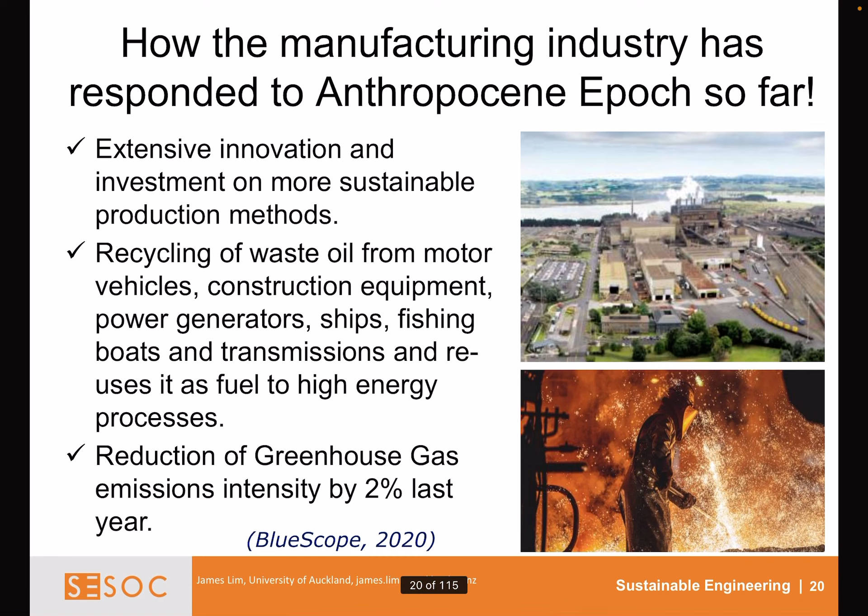Some further responses to the Anthropocene epoch: using co-products or waste products as a substitute raw material. Firms are investigating various co-products that can be used to reduce the carbon footprint of a finished product. An example here is using GGBS in concrete for harsh environments so that high quantities of cement are not required.

Electricity being generated from the production processes, harvesting heat energy, solar energy and wind energy to help run the operational process again. The key example here is solar and wind energy being generated from a production plant to help run the next key phase of production.

And finally, water recycling. Almost all production processes require water usage. This water can then be recycled back through the system numerous times before it is disposed of in an environmentally friendly manner, e.g. steel fabrication. The aim as a nation is to have a net water usage of 0.

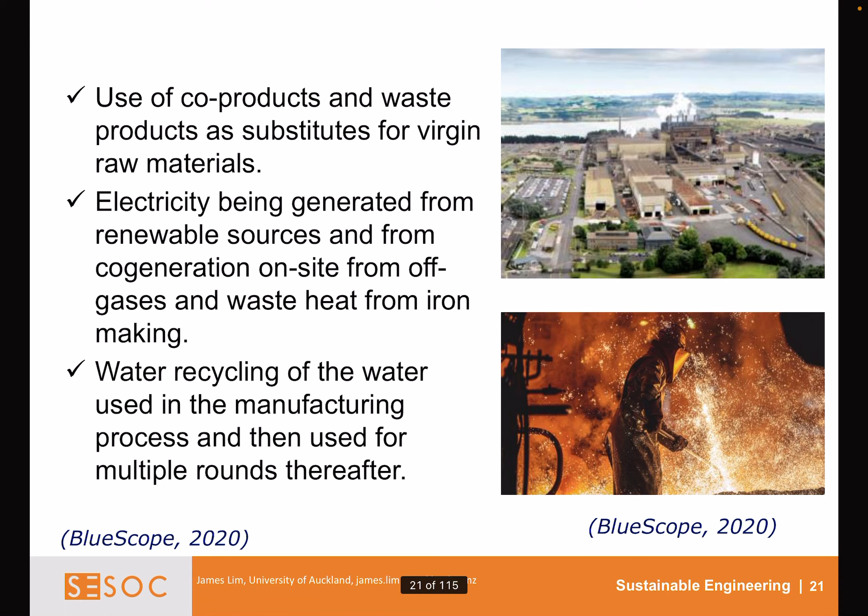What else can be done? Further collaboration with research institutes, perhaps partnering up with research institutes or leading universities to carry out research on more efficient ways of doing something.

Increased rate of energy harvesting from industrial equipment. We can increase the amount of solar, wind or heat energy being harvested from the production process. This can be used to aim for net energy usage of 0.

Enhance safety precautions and training for workers to enable worker protection while in the workplace. So further training and incentives to employers to promote a safer and healthier work environment is key to a more sustainable and restorative work environment.

Employ partnerships with local firms to use waste material as an energy source. Waste material from the production and construction processes used at industry plants to generate energy for the production process. This is commonly done at cement production plants, where waste needles are taken from hospitals and used to generate energy by burning them in the furnace.

Number 5, examine alternative sources of transport for finished product, i.e. train, barge, boat, etc. The most common method of delivery is by truck. If a site is in a suitable location, or if long draws are required, look at alternative options that can be used.

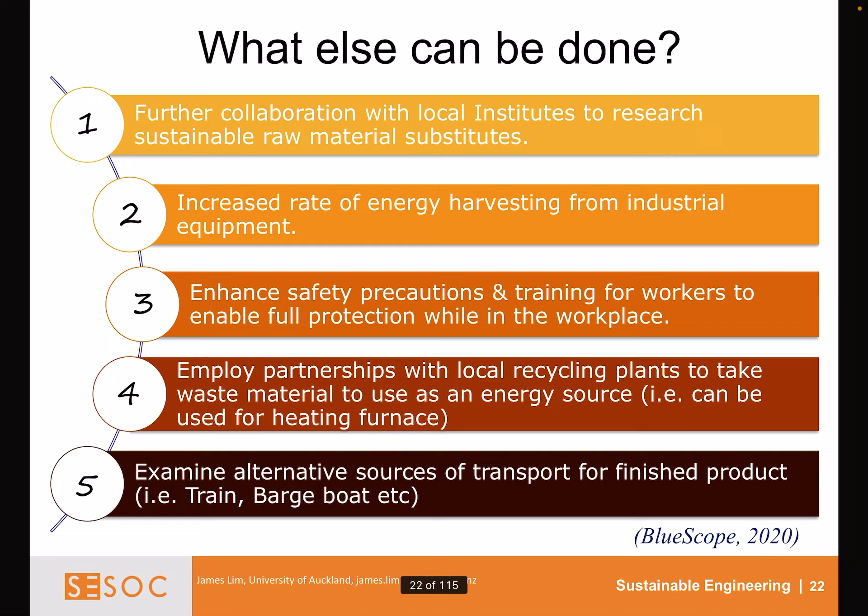Designing for sustainability. What are the various ways the applied action can be resisted? We're going to have a look at some typical structural engineering examples to start off with: first, a bridge project; next, a clear span structure, a transfer structure, a column design, and finally a steel connection design.

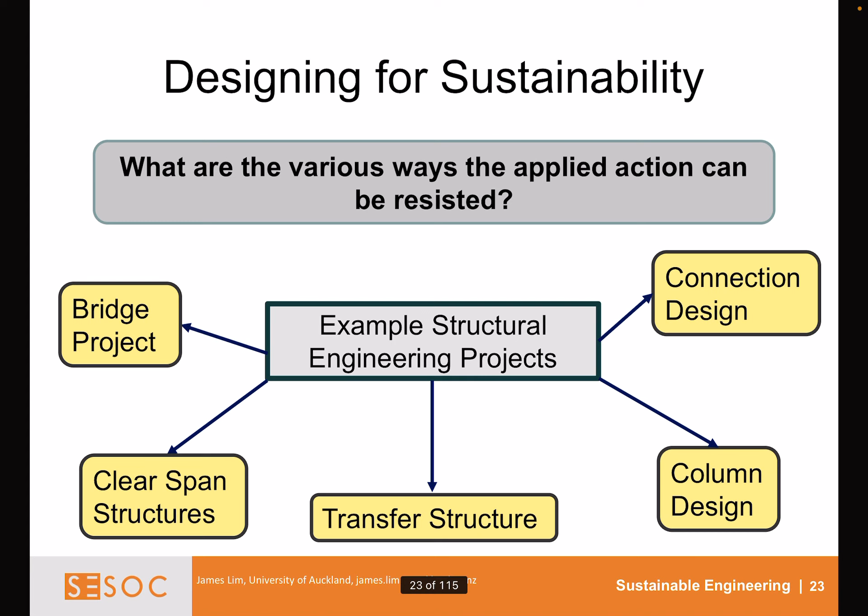So, taking a closer look at these examples: bridge project. If we have a 300-meter span, a suspension bridge would be more suitable than, say, a tied arch or catenary bridge. If we start with a tied arch bridge, how sustainable do you think it will be in regards to structural efficiency, material usage, deflections, etc.?

Now, looking at clear spans. For a 50-meter open span inside a building, what do we need to consider? If it is a warehouse, it does not need to be pretty, and enclosing it with a portal frame usually just meets specification. What about an airport?

A portal frame or space frame may not be acceptable. Perhaps a space frame may be more acceptable though than a portal frame. We need to make sure that people feel comfort and welcomed by inviting them into a sustainable, restorative development.

Number 3, extremely large actions on columns. What are the most common options? A: we can use pure reinforced concrete columns, which will be large, clunky sections that take up a lot of space. Construction issues that will arise are differential heating leading to cracking, and finally very large quantities of cement will be required, increasing the carbon footprint of the development, etc.

As an alternative, we can use pure steel columns, which generally require a specialized steel grade, such as S460NL. Some production issues that may arise are the fabrication of very thick plates, requiring preheating of plates to allow fusing of the plates during the welding process.

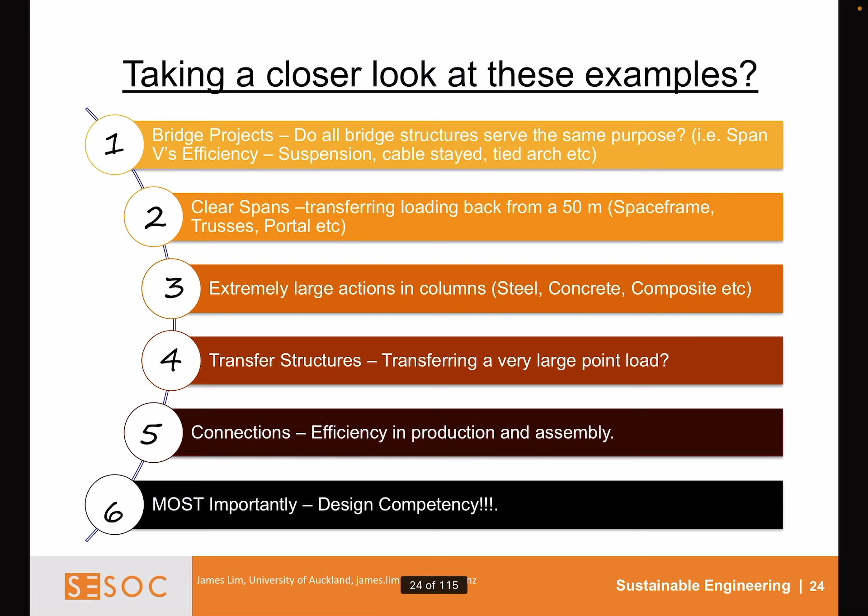And finally, we have design competency. If you have not completed a design process before, you need to have some training and guidance before, during the task. All calculations must be checked by an experienced engineer.

So, fundamentals of engineering to approximate section size. In any conceptual design, it's essential for us to have a strong foundation in our structural mechanics. It could be treated as the foundation for starting any sustainably sized section.

For example, there's no need to use an 800mm deep reinforced concrete beam if all we need is a 500mm deep beam. This 500mm deep starting point can be easily extracted from your mechanics calculations.

The fundamentals of engineering should be used for sizing all structural elements at the initial design stage, and it provides a foundation of understanding to why exactly the chosen size has been selected.

Speak and review as you go. A quick example has been included here to size a steel beam, and this should be told as a story. As you can see here, using these equations, you're able to get a very quick idea as to the size.

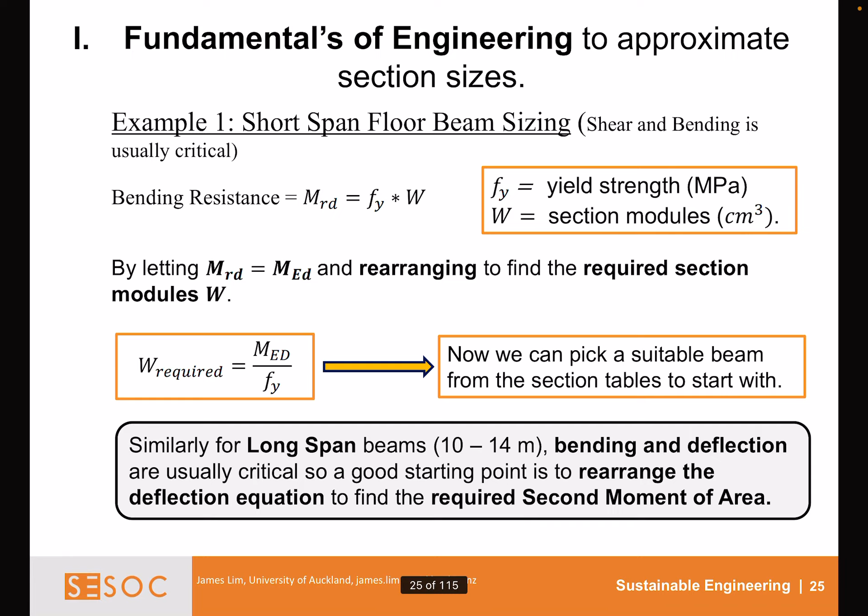More commonly, what's used in design offices are span to depth ratios. These require less work and less understanding, possibly an unfavorable approach. We need to have a good understanding of the fundamentals of engineering to understand the boundaries within which we work.

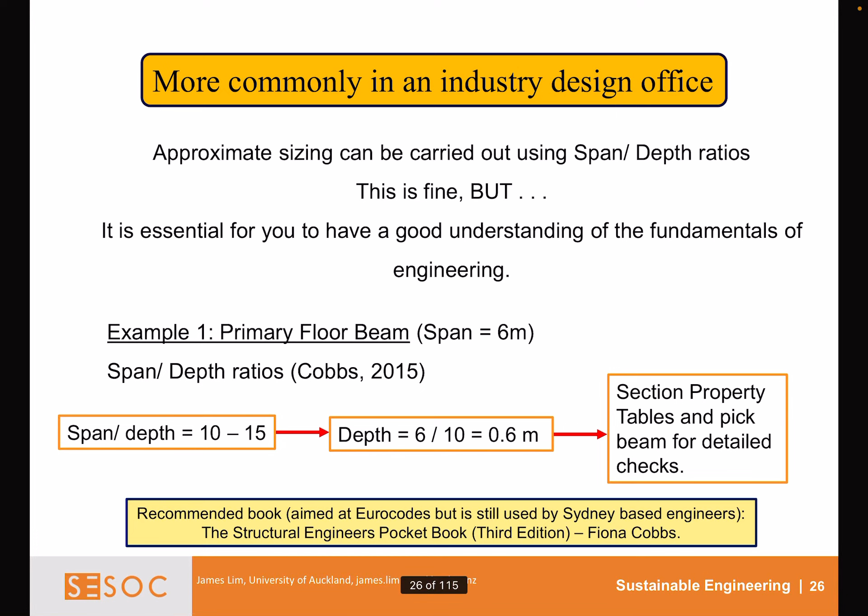So the second example is the typical truss with a point load applied to it. Bending resistance is treated as a push-pull or couple resisting the bending action. The tension and compression resist the bending moment through the couple force action, therefore C equals T.

Now we can pick out a suitable section from the section tables to start with. Buckling capacity will be critical. Similarly for...

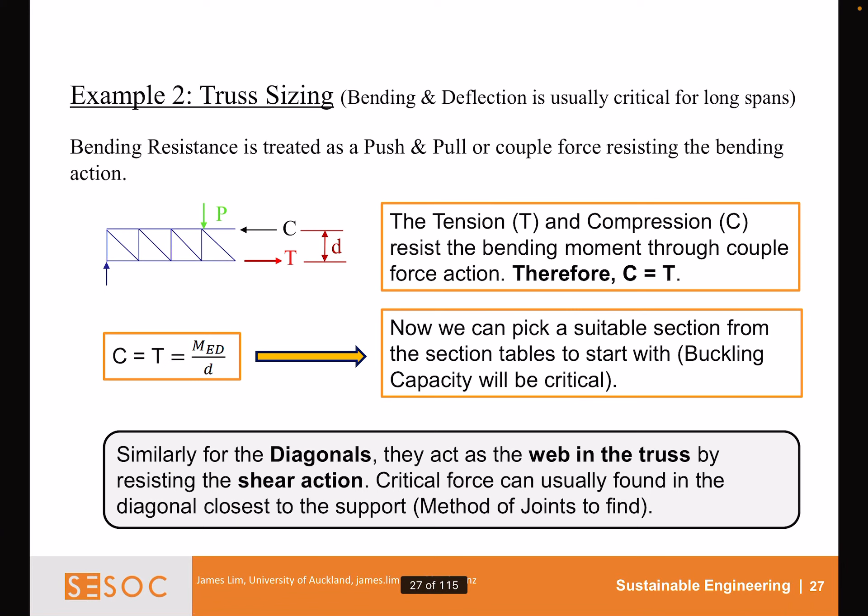diagonals, they act as the web in the truss by resisting the shear action. Critical force can be found in the diagonal closest to the support. Method of joints can be used to find this.

The next phase of the life cycle assessment that we're going to discuss is the building part manufacturing stage. With the building materials we have produced, how can we use these materials to make construction parts?

Taking some building parts examples, first of all we have precast concrete products, next we have steel fabrication in the workshop, next we have glulam timber beam production, next we have structural glass production, and finally we've got the production of PVC draining pipes.

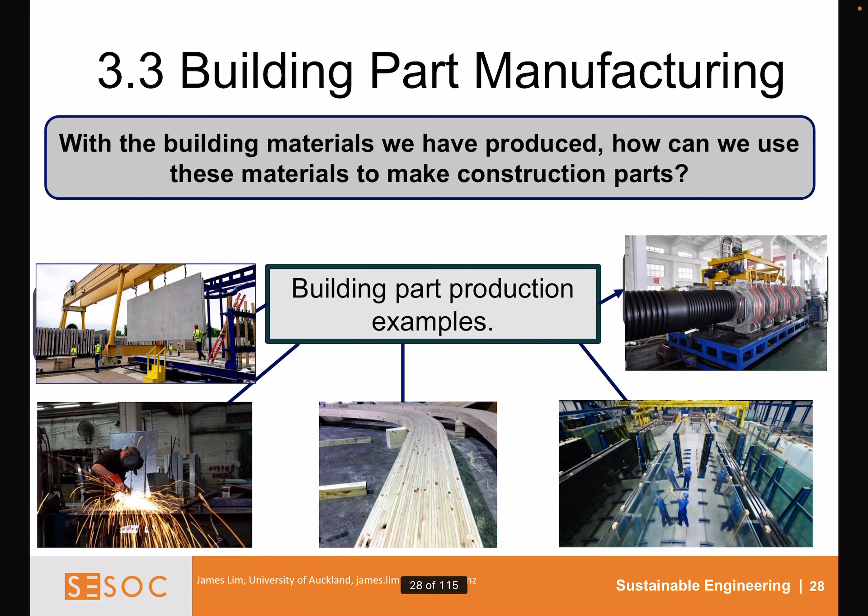Factors to consider when looking at the fabrication process. Our first factor is the manufacturing resources available to us for the parts required. Next, the environmental impact that the fabrication process in question poses.

3. The cost of production process must be considered, and this be influenced by how well equipped we are to produce the building parts. Next is the logistical capabilities we have available to transport the building parts.

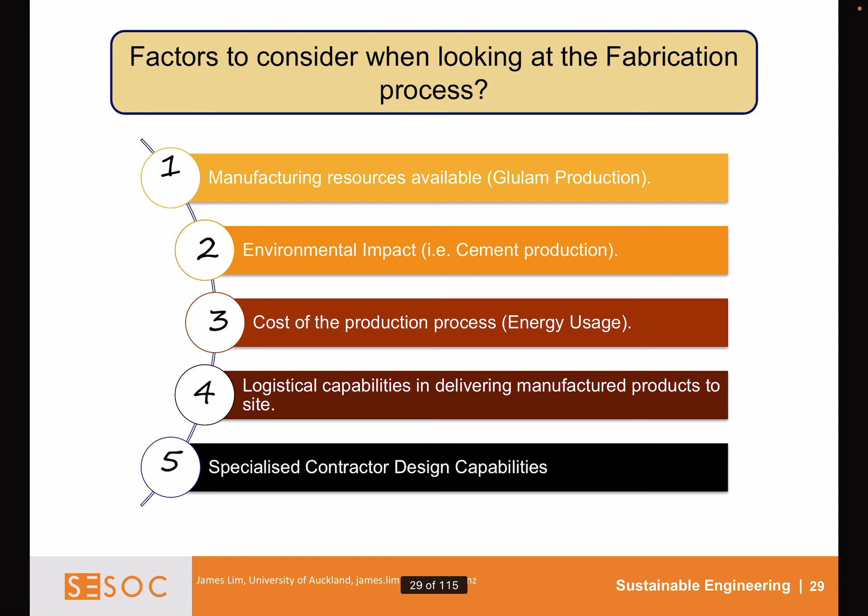An example of this is transporting an 80-meter glulam beam. Do we have the resources to deliver this scale of the element? And finally, we need to consider the labour skill set available to us. Have we the skilled labourers available to manufacture the beam?

So let's take a look at sustainable structural timber, which I know Gary has talked more about.

Advantages: it's got high strength capacity, delivers nature-themed development, raw materials are local and renewable, low energy consumption for the manufacturing process, it absorbs carbon dioxide, and maintenance over the life cycle will depend on the protective coating applied.

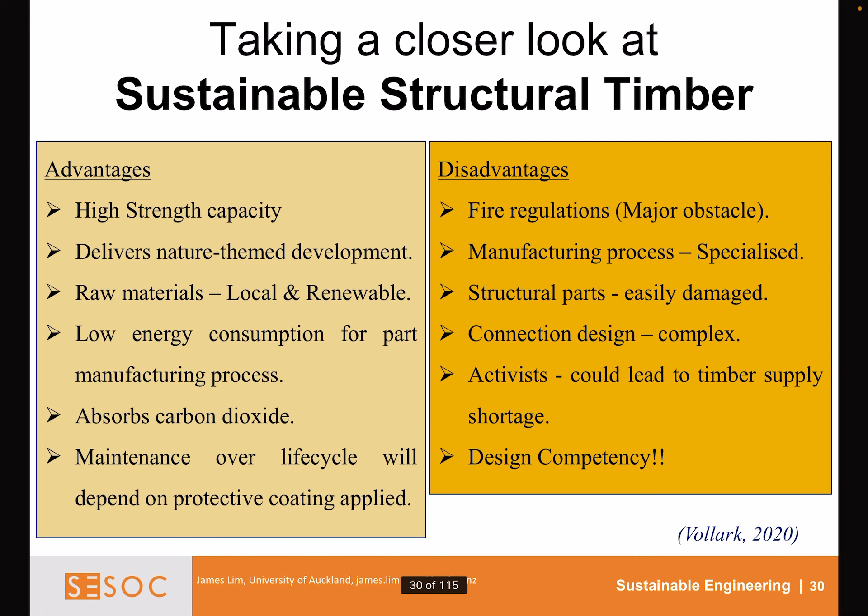The disadvantages: fire regulations are a major obstacle, manufacturing processes are very specialized, structural parts can be easily damaged, connection design can be complex, activist activities could lead to timber supply shortages, and there are design competency issues.

About cross-laminated timber, this picture shows the bracing connection, and examining it in closer detail you can see the complexity of the connection and various methods of connection for the glulam.

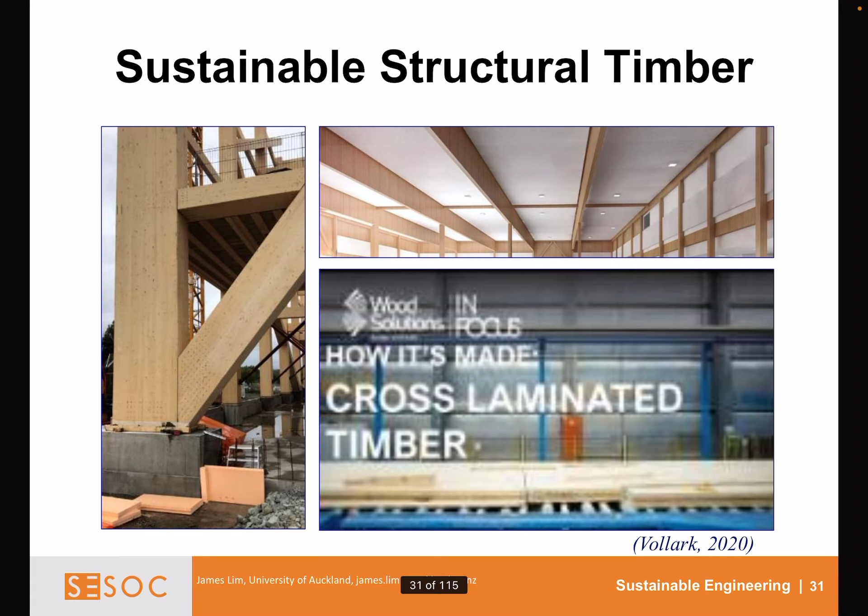The top picture shows the glulam runner beams providing a clear open span space for a swimming pool, and there is a video you can watch showing the glulam or cross-laminated timber manufacturing process and the equipment required to produce such parts.

What about precast manufacturing? Advantages: excellent quality control, exact material quantities coming from BIM, less environmental pollution on site when pouring the concrete, quick installation process, low maintenance over life cycle for fair-faced finishes, and efficient structural systems meaning a reduction in section size.

The disadvantages: robustness in high-rise buildings is still being researched in many institutes, the manufacturing process is specialized, connection design is complex, emissions required to produce the finished product are higher than timber, there's design competency needed for precast, and educational programs built around RC.

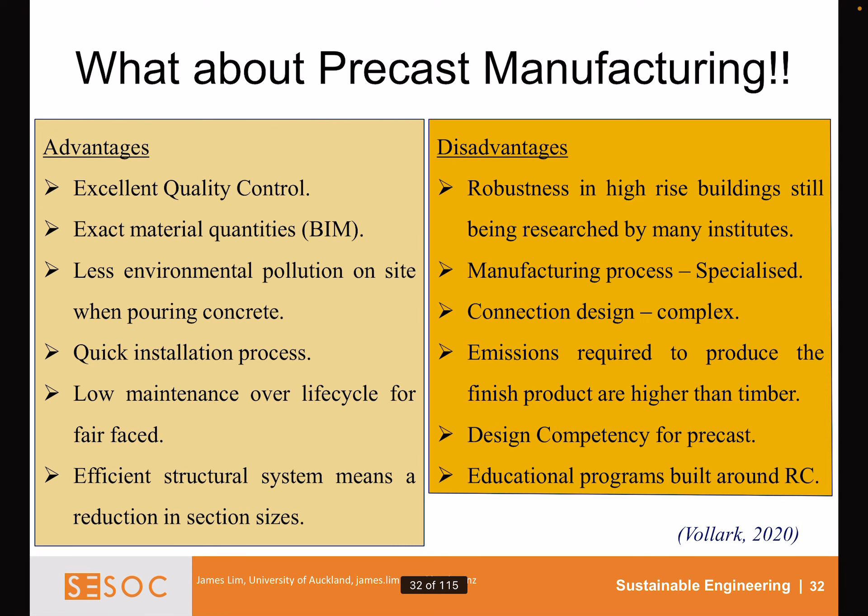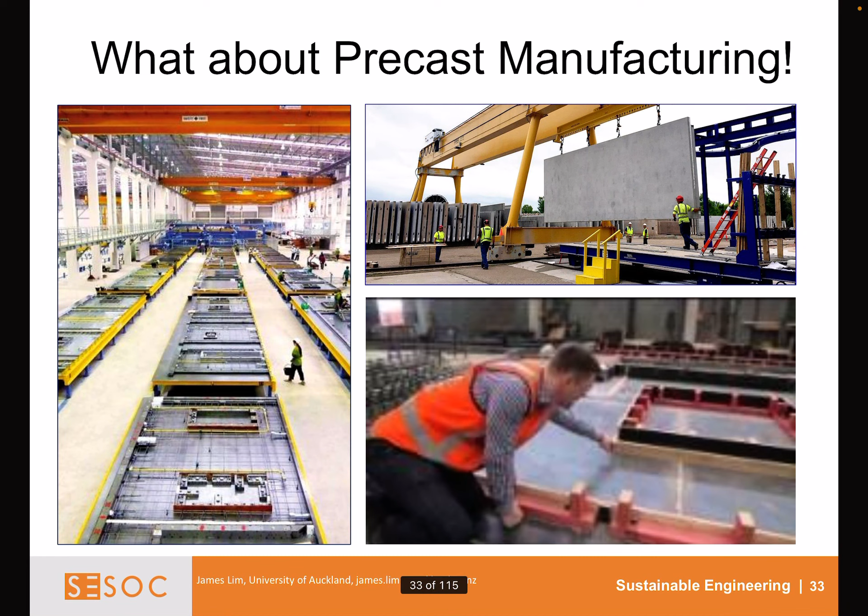The picture on the left shows the formwork for the wall panels ready to be poured in the factory. The top picture shows the completed floor slabs being lifted out onto the loading bay, and finally the video provides a demonstration of the precast manufacturing process and the equipment required to form some wall panel parts.

The next phase of a development's life cycle assessment is the assembly of the parts, or the construction process for the built environment. Some common construction processes on site: first, traditional in-situ construction; next, prefabricated steel framing; next, precast construction; and last but not least, modular pod construction.

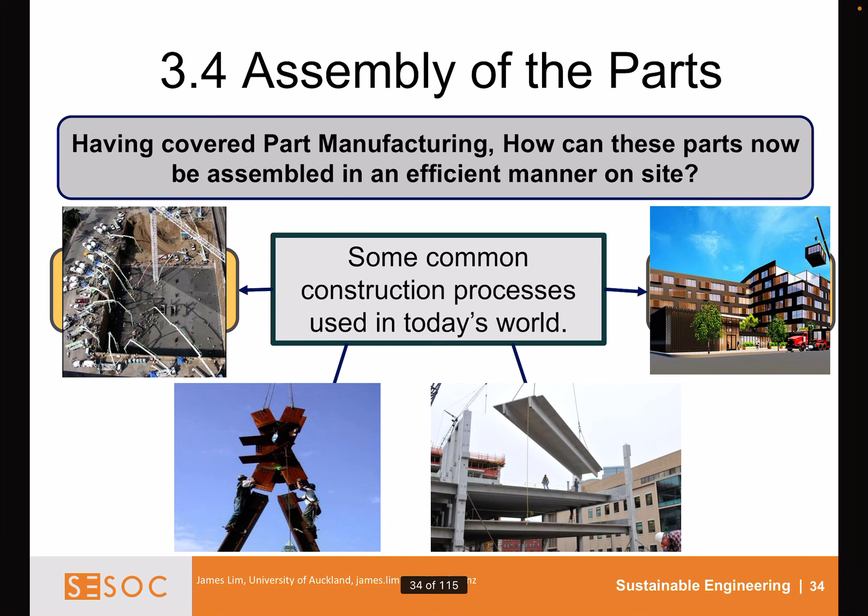Choosing a sustainable construction method: the construction method is becoming a more dominant factor when a client is aiming for sustainable and/or accredited green development. Factors to consider when selecting a construction method include carbon footprint target, environmental protection policy, quality assurance target, complexity of development, labour resources, program schedule, and site location.

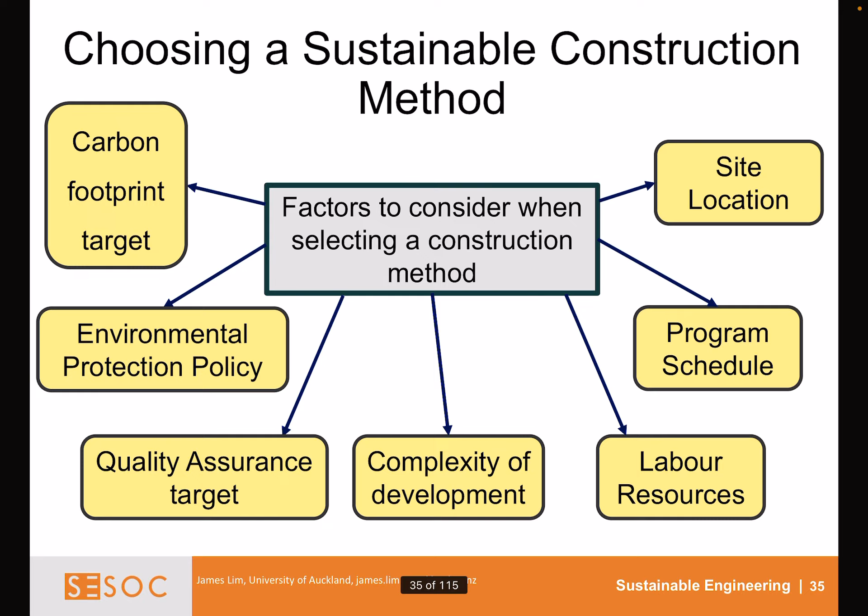So let's take a look at the traditional construction method, or in-situ construction. Firstly, release of carbon emissions: cement production accounts for 8% of carbon released annually. Other factors to consider include transportation emissions for large quantities of concrete, i.e. 200 to 300 trucks in one day.

Second, imperfections in the structure constructed. It is next to impossible to construct the building exactly as designed in detail in 3D structural engineering software. However, as physical imperfections become greater, internal or secondary stresses can be introduced at key locations that have not been accounted for. This leads to a structure not behaving as expected, which is a major issue, and this phenomenon can lead to deflection issues, spalling, cracking of concrete, life cycle issues, etc.

Number 3: when estimating the quantity of concrete required for a large floor slab, it is common practice to order more concrete than needed rather than running short. This amount varies depending on the risk factor and the importance of the finish to the element, i.e. an exposed concrete wall in a prestigious office block versus a farmyard wall. Therefore there's almost always excess concrete that needs to be disposed of. The method of disposal can vary greatly depending on the site—a small country site can typically dump it in an environmentally friendly manner.

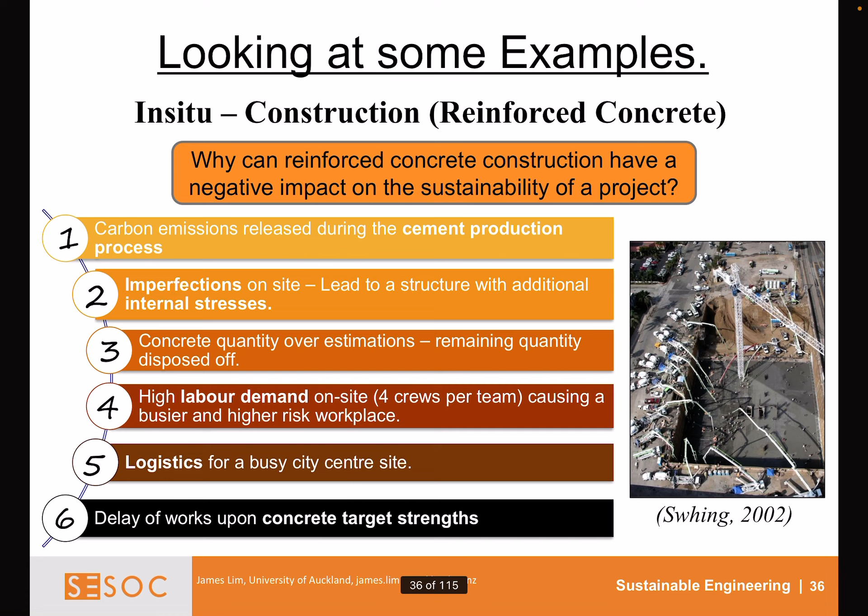So, some tips on how to protect the environment while pouring concrete. Concrete is extremely toxic to the environment, and it takes 100,000 litres of water to dilute 1 litre of concrete. It is essential to keep the site clean and tidy with no excess water around the site where the pouring of concrete is being carried out.

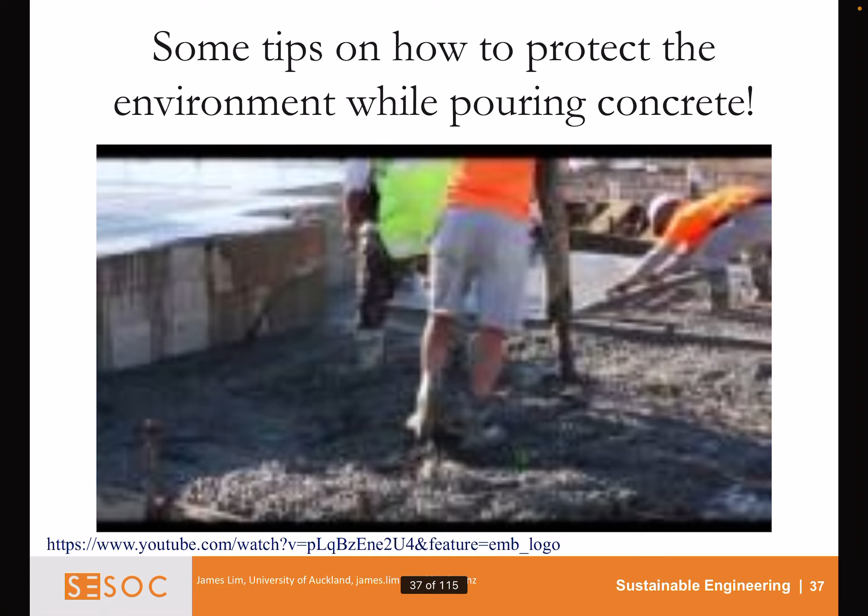More recent construction methods. This time we're going to be looking at steel and concrete framing. Since the building is mainly manufactured in the workshop, better accuracy can be achieved as it is assembled on site in accordance with the workshop drawings.

If something is wrong, it is a lot easier to find the fault and who is to blame for the problem. Imperfections can also be more accurately modelled to include additional stresses that may be caused due to imperfections, e.g. applying an action at a specified eccentricity for the connection type used in the structural system.

Less waste is generated. Since the production of the building is carried out in a factory environment, more stringent measuring techniques are in place to ensure as little waste as possible is achieved. On an industry level for the likes of structural steel, all members are cut using a CNC machine to the nearest dimension, i.e. the nearest millimetre, but this can depend on the equipment resourcing.

If there are offcuts from the raw steel, they are collected into an allocated section and either reused for smaller details, e.g. complex connections, haunches, etc., or are sent back to the raw material producer to be recycled into new products. Reduce noise and dust production.

Number 3, on-site compared to in-situ construction. Large amounts of vehicles coming to and from the site leads to an unfriendly environment for the surrounding buildings, i.e. dust, dirt on the roadways, danger to pedestrians, etc. By using prefabricated sections, more stringent control can be kept on the environmental impact to the surrounding areas.

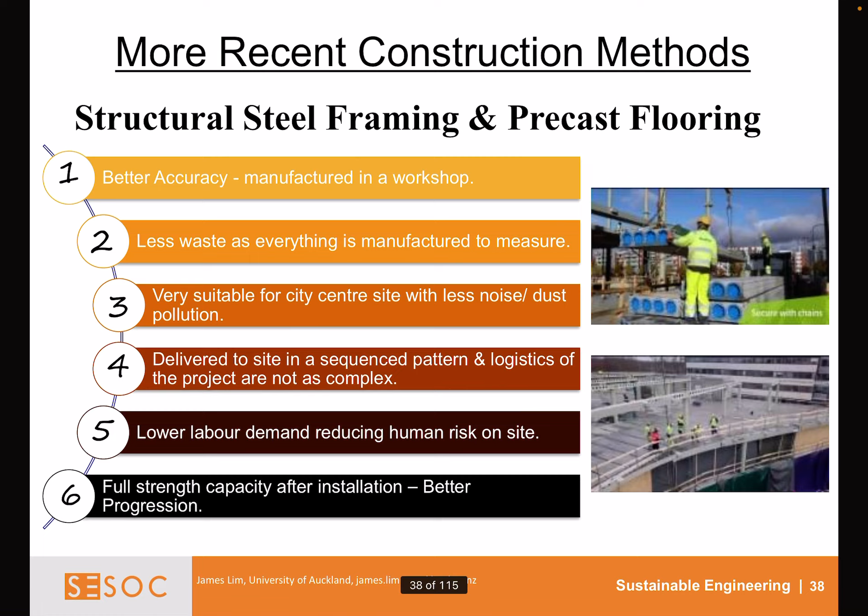Number 6, almost full strength is achieved after the installation of the prefabricated members. This enables rapid progression of the development on the schedule initially programmed. Clients looking for rapid build tend to prefer this option as there is more certainty in the program schedule.

Now moving on to precast concrete buildings, precast construction. Firstly, excellent quality control. The entire building is manufactured in the workshop. This means imperfections can usually be found during the inspection process before leaving the workshop.

Better finish to the concrete is also a major factor as to why this option is chosen if the concrete is being left exposed, i.e. fair-faced concrete. Almost zero waste as the development is manufactured into full-size pieces in a factory environment. Any material that is left over from one structural section can be recycled and used in another section. This reduces the carbon footprint over the development, immensely improving the green building status of the development.

Number 3, reduced noise and dust pollution on site compared to in-situ construction. Large amounts of vehicles coming to and from site cause an environmental impact to the surrounding area, i.e. dust, dirt on roadways, danger to pedestrians, etc. Using this construction method is much more suitable to help protect the surrounding areas from these major obstacles.

Number 4, logistics, suitable for a city centre site. By using this method over in-situ construction, it is not as significant if the truck gets delayed, as the elements are already formed in the factory.